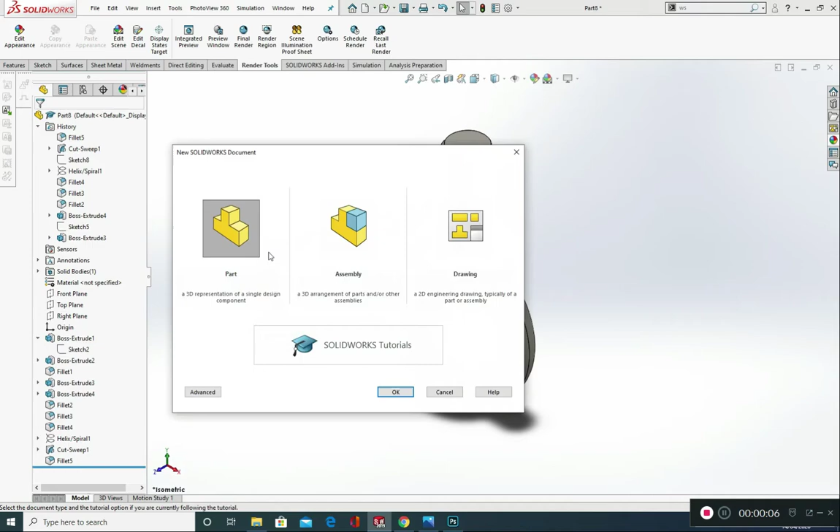Okay, so I'm in SolidWorks and I'm going to go to File, New, Part. We're going to start this off in the top plane and go to Normal To. We're going to go to Sketch and sketch a circle from the origin point, left click. We'll go to Smart Dimension, left click on the circumference, and give this a smart dimension of 20 millimeters.

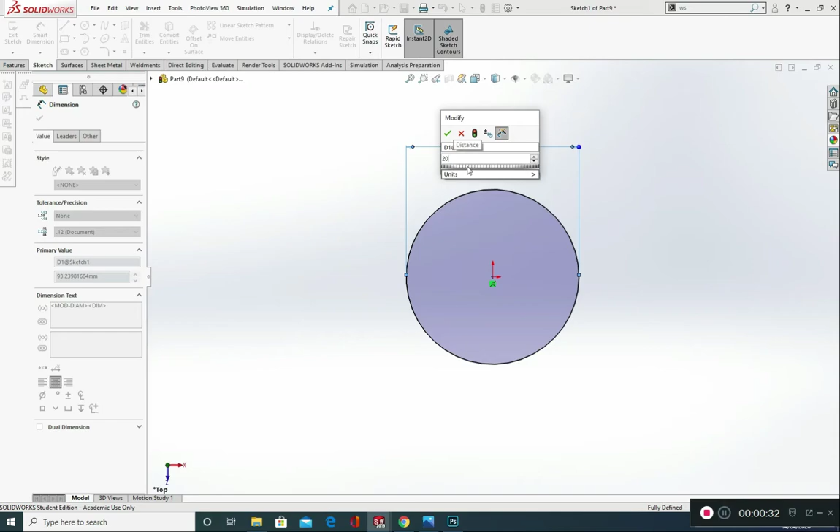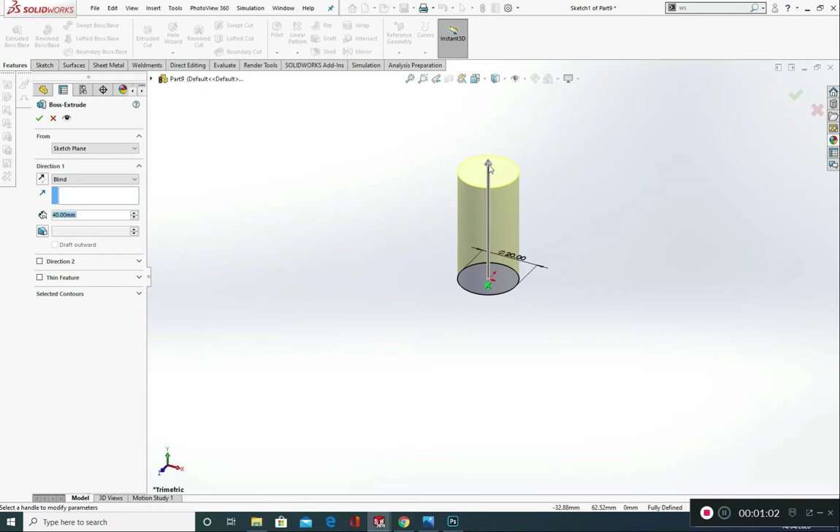From here we're going to make a feature out of this sketch. We're going to go to Features, and you'll notice there's a few options in here. We're going to choose Extrude Boss Base. You can see we're getting a preview of how much that's getting extruded by at the moment, that's getting extruded by 10. However, if I click these arrows they'll go up in increments of 10. Alternatively, I can get the arrow on screen and move it down, move it up, move it the other way, to have a look at what my extrude will look like in order to turn that sketch into a 3D part. I want to extrude this by 40 millimeters, and I'm going to click on the green tick. Perfect.

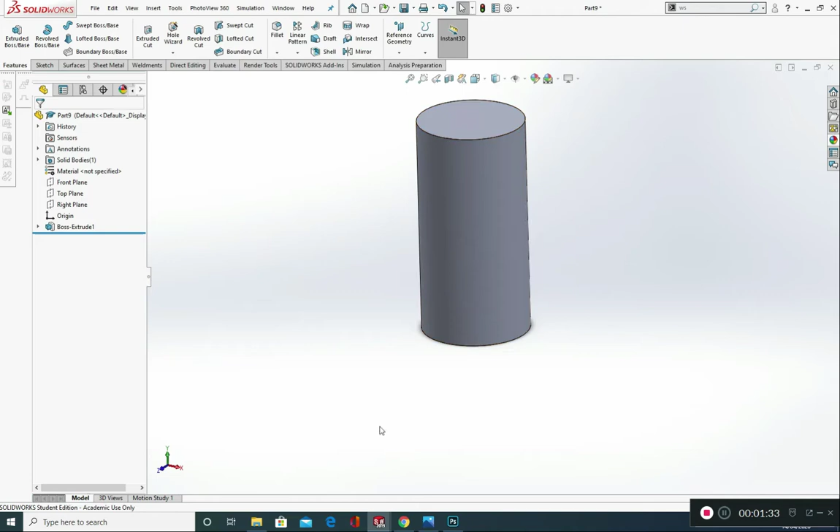From here I've just clicked on origin there to see where my origin point was. We're going to click on this face, so orbit your model round using the middle mouse button and moving the mouse. Click on this face and we're going to say Normal To. Alternatively, we can click on this face and press Ctrl and the number 8 on our keyboard, and that will do exactly the same. From here we're going to go to Sketch and Circle.

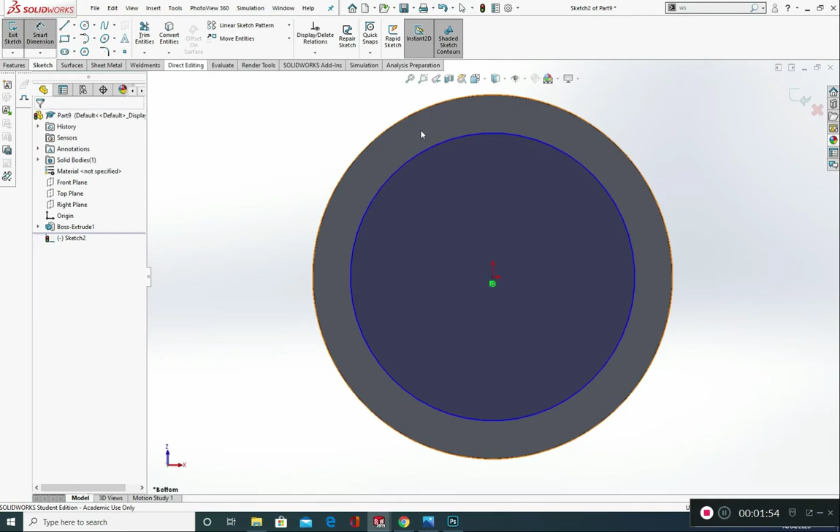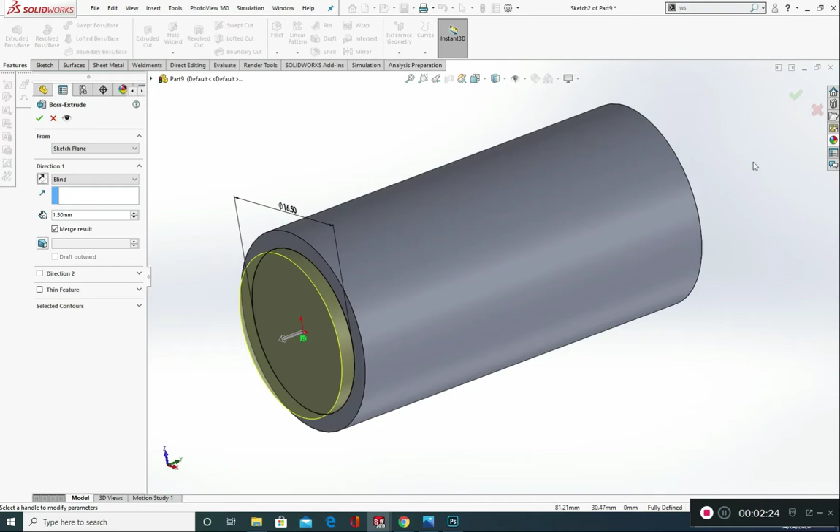You're going to sketch a circle here and give this a smart dimension of 16.5 millimeters, like so. You're going to do exactly the same on this one: go to Features, Extruded Boss Base, and let's extrude this one by 1.5 millimeters, only a tiny bit, in this direction. Make sure that you've not flipped it and it's going inwards - it should be going outwards, so the arrow's facing away from this cylinder that we've created. Once we've done that, click on the green tick.

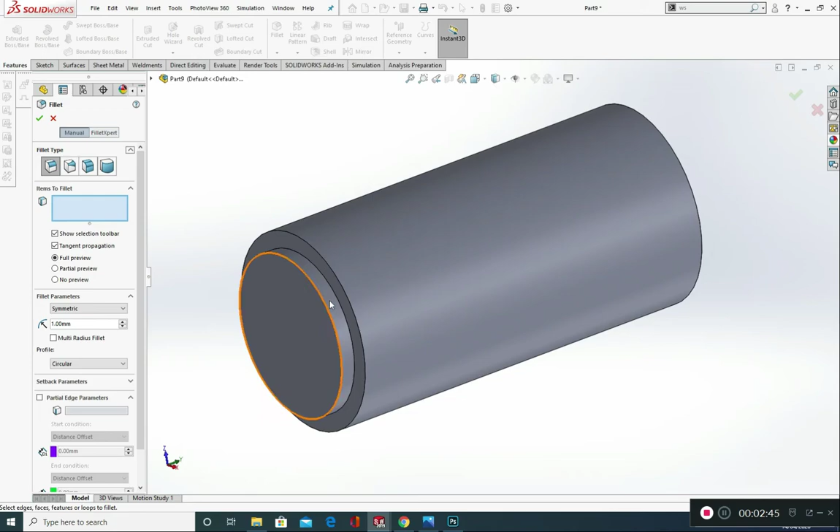And then go to Fillet. So in Features you'll see Fillet, and under Fillet you've got Fillet and Chamfer. We want to fillet by 1 millimeter, so in your fillet parameters change that value to 1 millimeter, and we want to click on this edge, like so. We get a little preview, and we're going to press the green tick.

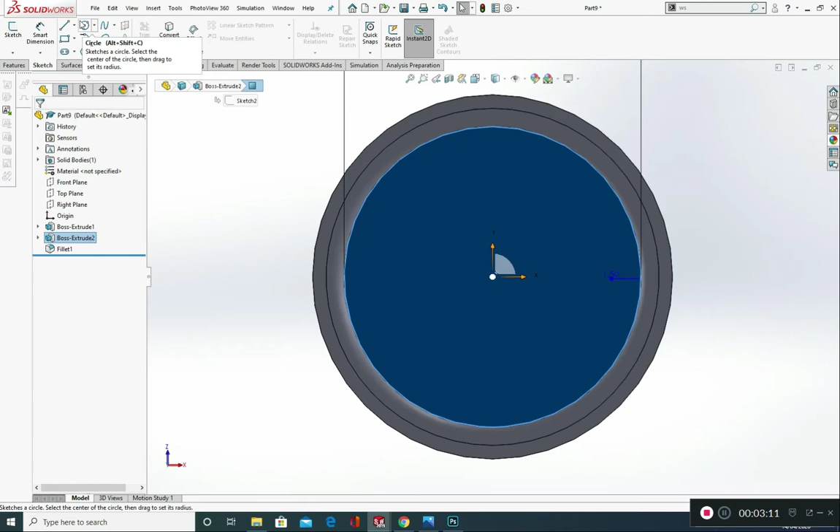From here we're going to click on this face and say Normal To, and create another circle. So we're going to go to Sketch again, Circle, and create a circle again from our origin point, sketch that out, then smart dimension it up - this is going to be 40 millimeters. We're going to go to Features, Extrude Boss Base.

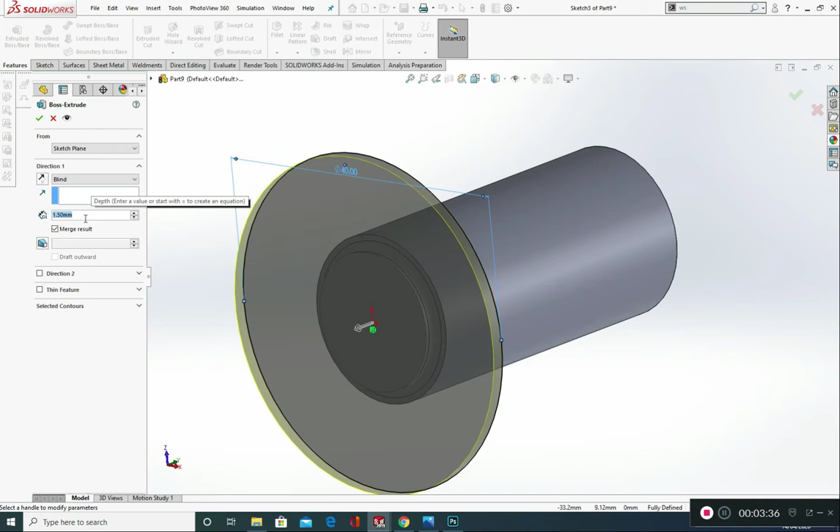This one's a little different. We're going to extrude this by... let's go 15. In fact, let's change this - let's go 18 millimeters on this, 18 millimeters, and we want to create a draft angle. So here we're going to click Draft On, let's turn that on, and we're going to put a value in here of 7 degrees, so 7.

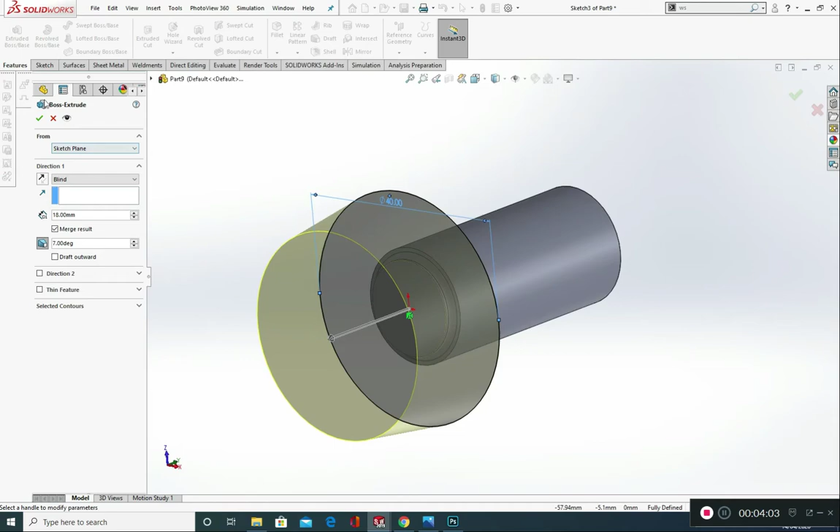And we're going to click on the green tick, like so. I want you to go into a front plane now and normal to.

Then we're going to sketch a circle, and I want you to sketch 2 circles. Try and keep it in line with the origin if you can. I've not clicked yet, I'm just hovering over my origin, and you notice you're getting that blue dotted line. That tells me I'm in line with my origin point. You can do it with this point here too, move down and you're going to get a blue line there. Left click, and I want you to draw 2 circles.

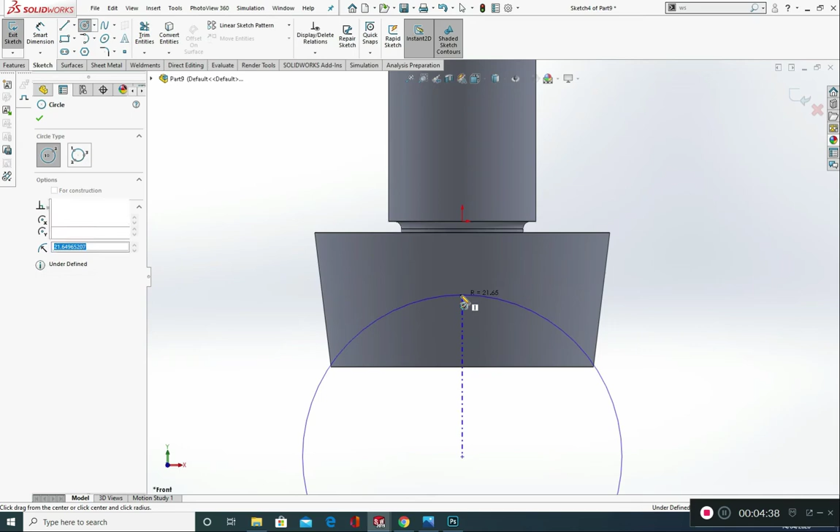So that's one. Go back to that center point of the circle, draw another one, and you're going to give these some smart dimensions. Now, before you do, let's just make sure our center of our circle is lined up with the origin point, and to do that we're going to create a relation.

I'm going to click on the center of the circle, hold down Control, click on the origin point. I've still got Control pressed down. I can let go of Control, and I can make a relation vertical. You can see these 2 green markers now, that's telling me those are locked in, and the relationship between those will always be vertical unless I delete them. If you wanted to delete them, you could just hover over, right click, and say delete. We're going to keep these in place.

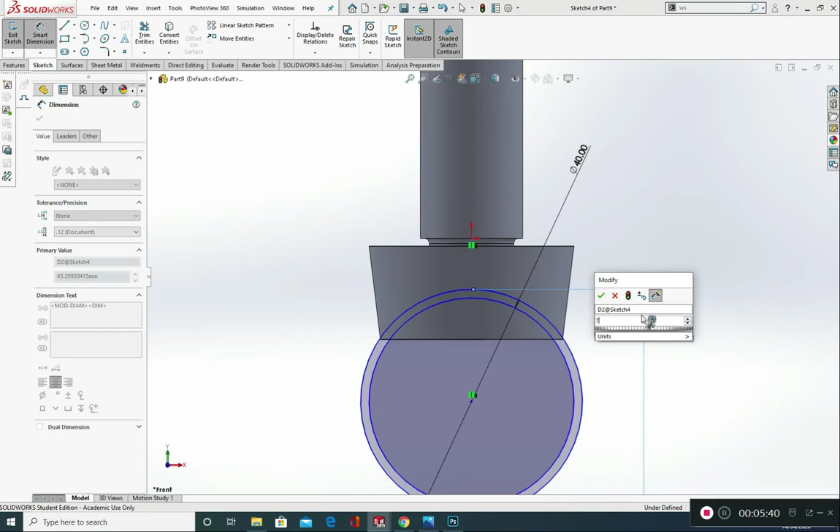Right, let's smart dimension up our circles. The inner one I would like to be 40, and the outer one we're going to make this 70. We need to give a smart dimension from the center to our origin point, and I'd like this to be 36.5 millimeters, and green tick.

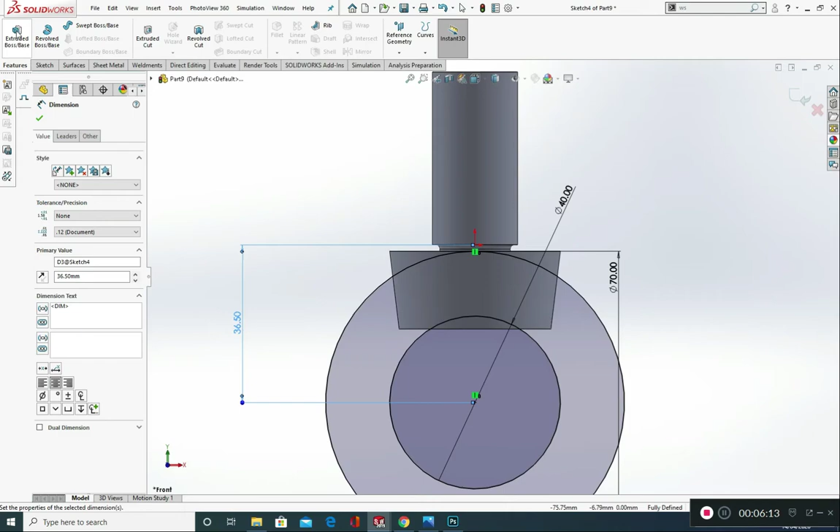I'm going to go to features now and extrude boss base. Now, at the moment we're extruding this blind in this direction. We want to change this direction from blind to mid-plane. There's our origin, it's going to go an equal distance, if I put 20 in there for example, it's going to go 10 one side and 10 the other, just to make it nice and equal. We're going to put a value of 15 in here, and click on the green tick.

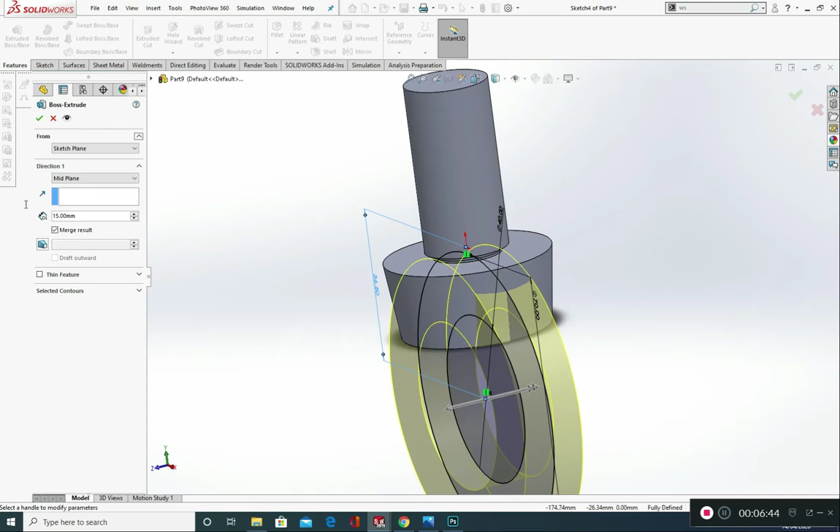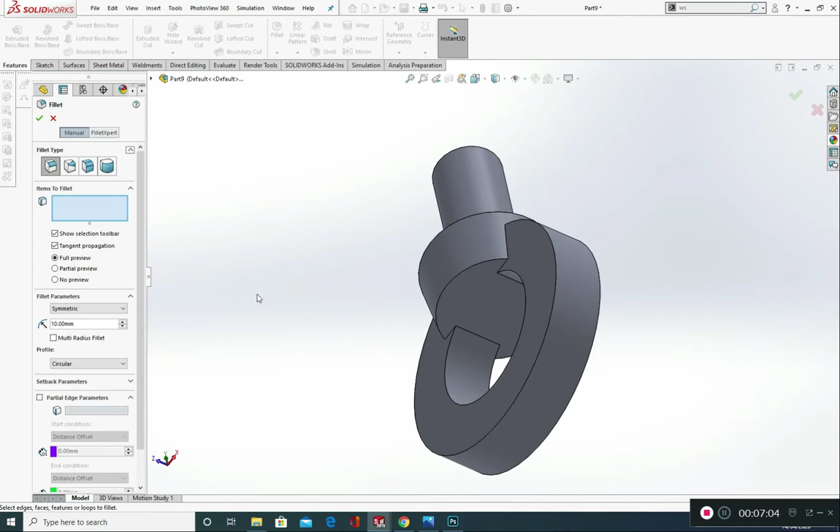Perfect. The next thing we're going to do is go to fillet. We're just going to put some fillets in here. So let's go with a fillet of, let's have a look what 10 looks like. It's a bit too big, let's go 8. Maybe a little lower, let's go 5.

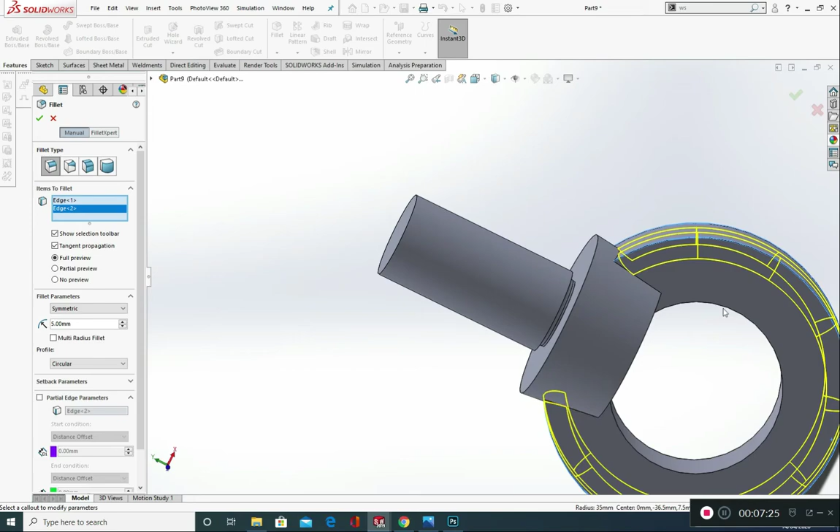Okay, 5 on this side. We're going to go 5 on this side. We're going to go 5 on this edge here, and we're going to go 5 on this edge here, like so. I'm just going to have a little look at that. Green tick. Okay, I'm quite happy with that.

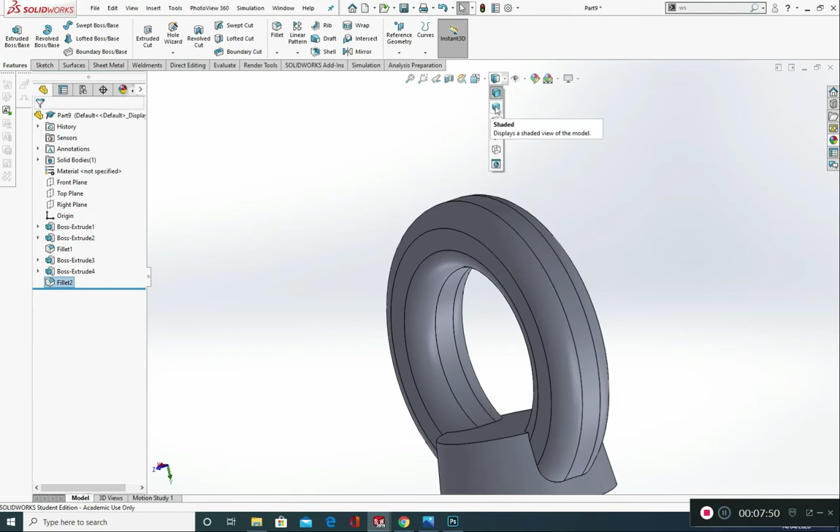The lines that you see there, you don't have to see those, you can turn those off if you want. If you go into display, you can just have shaded, you don't have to have edges, you can just go into shaded. I'm going to have shaded with edges though.

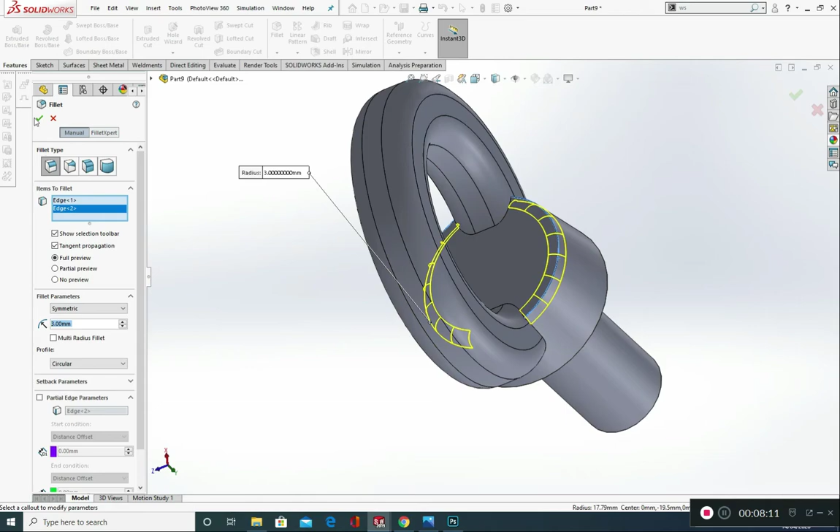Let's put some more fillets on here then. So let's go into fillet, and let's choose to have a fillet of 3 millimeters this time. Let's do this top bit here and this side here, just click on those edges and green tick. And we're going to go into fillet again, and let's do some 1 mil fillets this time, around here, and let's go around on the other side as well. Perfect.

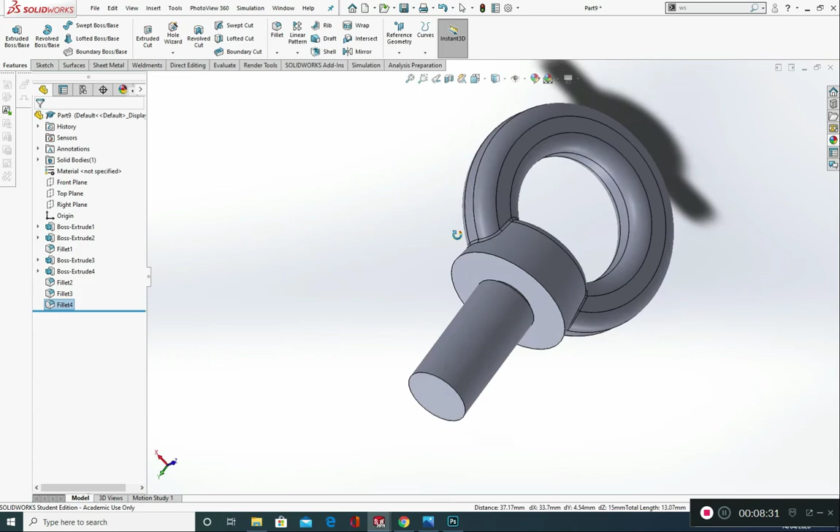Okay, and let's go for a 1 millimeter fillet on here as well. Lovely. Right, from here we're going to create a

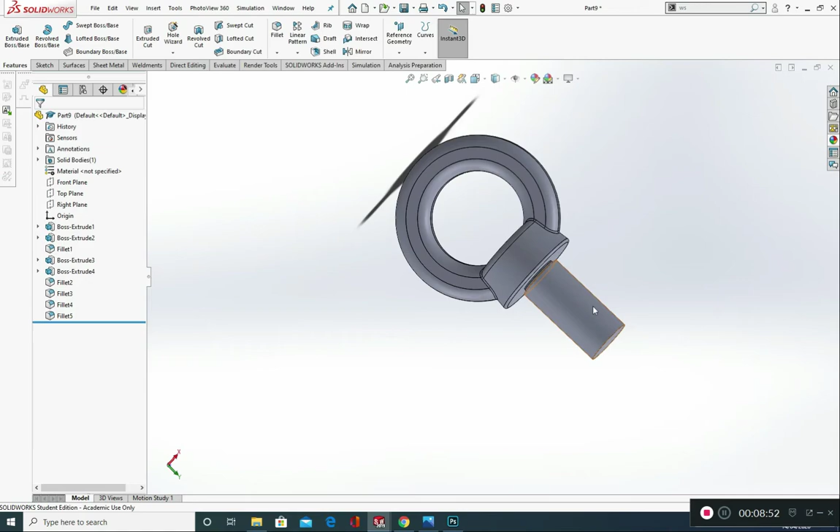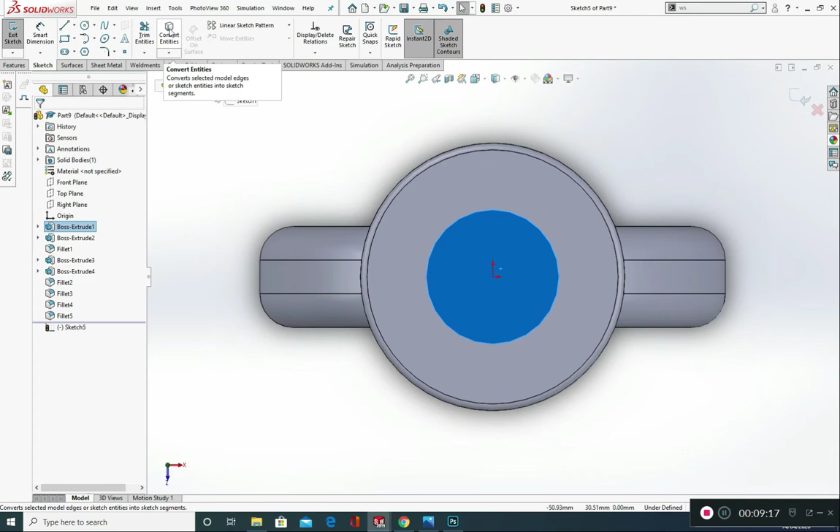Helix on this surface, this face should I say here. So you're going to click on this face to start off with, and we're going to say normal to. Just do that again, left click on it, normal to, and we're going to say sketch. I want you to say convert entities, that's in the sketch tab, so convert entities, like so.

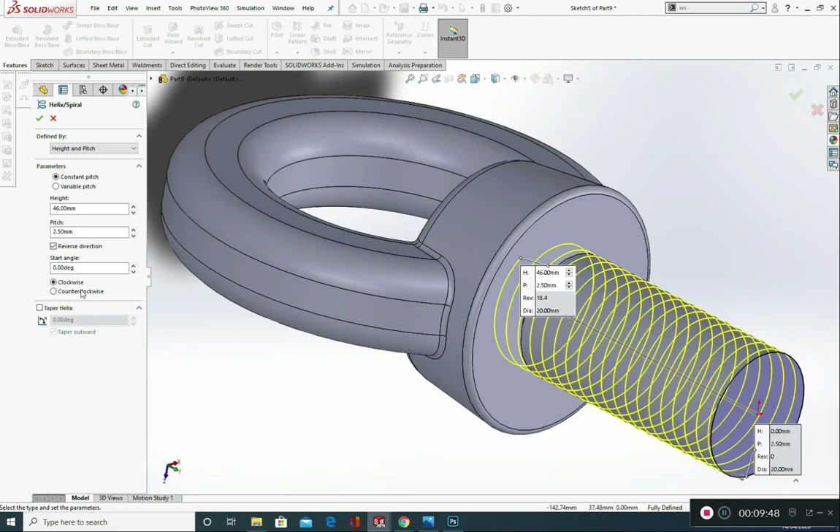And then you're going to go into features, curves, helix spiral. Okay, now we want height and pitch, constant pitch, 46, 2.5 is the pitch, reverse the direction so it's facing in the direction of the eye, start angle 0 degrees and clockwise. Okay, and you can click on the green tick. You can see that our helix is in place.

We're going to go to a right plane now and normal to, and then we're going to sketch up here. We're going to sketch our cutting profile. So I've just gone to sketch and line.

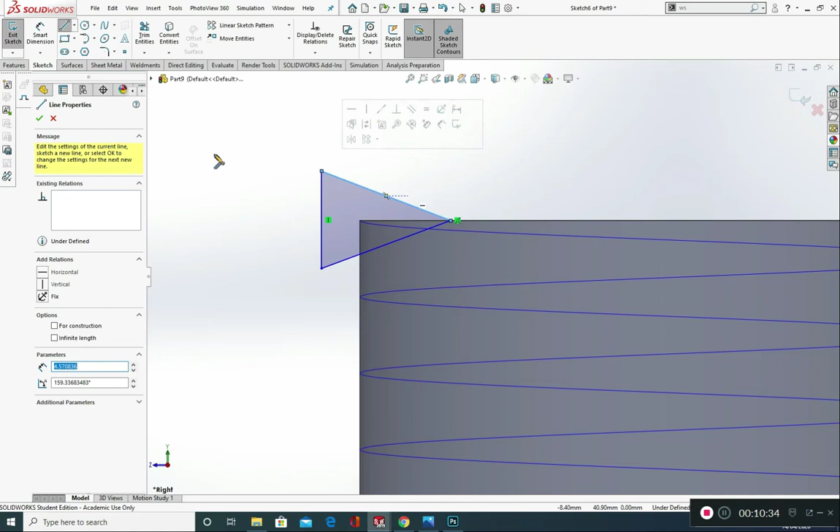I'm going to draw a triangle in there like that. Just going to put a center line from the tip of my triangle to the midpoint of the base of it. I'm going to click on this line here, hold down Control, and click on this line, and make those equal.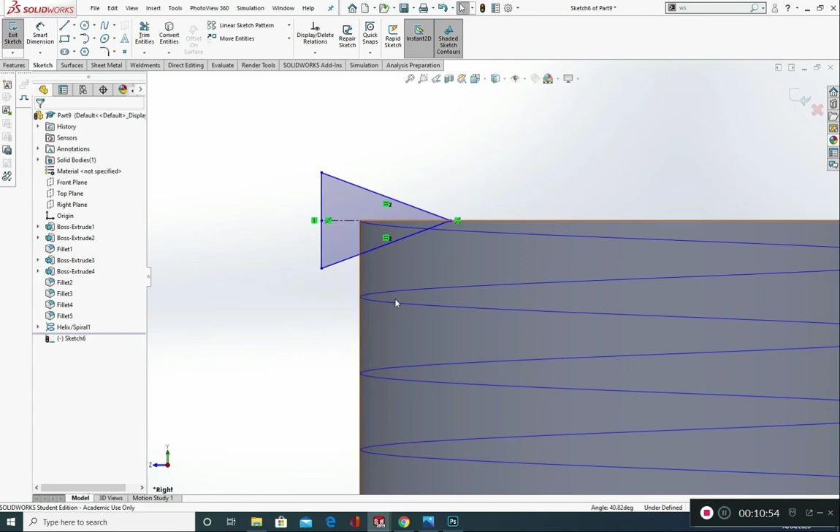Like so. And I'm going to smart dimension this up now. I'm going to give a smart dimension for the angle. This is going to be 52 degrees. I want a distance from this point to this edge to be 2.2, and I want a distance from this point here to the bottom of my triangle, so the height, and I'm going to make that 2.52.

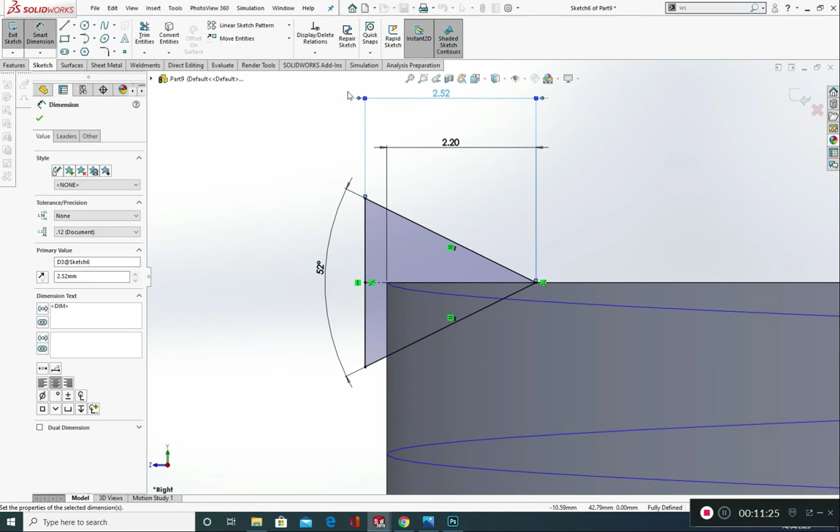Now from here you can exit the sketch, so click on this blue arrow that goes through this kind of shape here. Just left click on that, and then from there we're going to go to Features. We're going to say sweep cut.

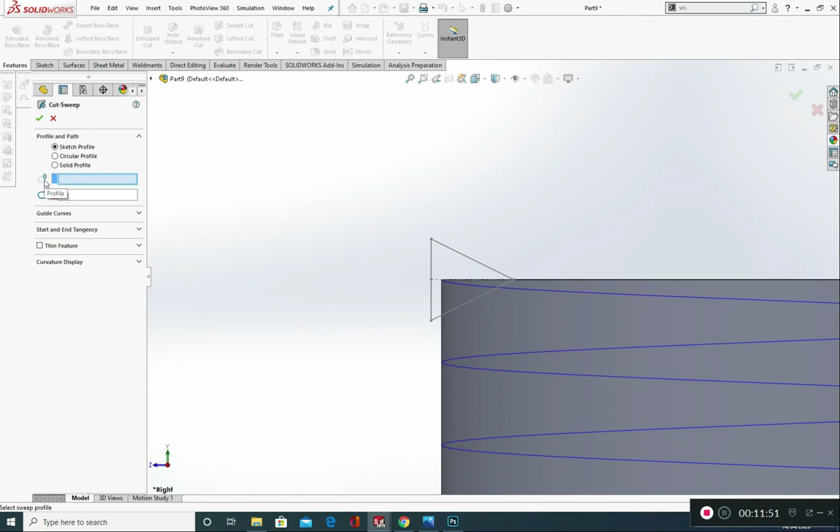It's asking us here for our profile. This is the profile, so left click there, and then the path is the helix. Okay, it's calculated that cut. We don't need to change any other options in here, we're just going to click on the green tick.

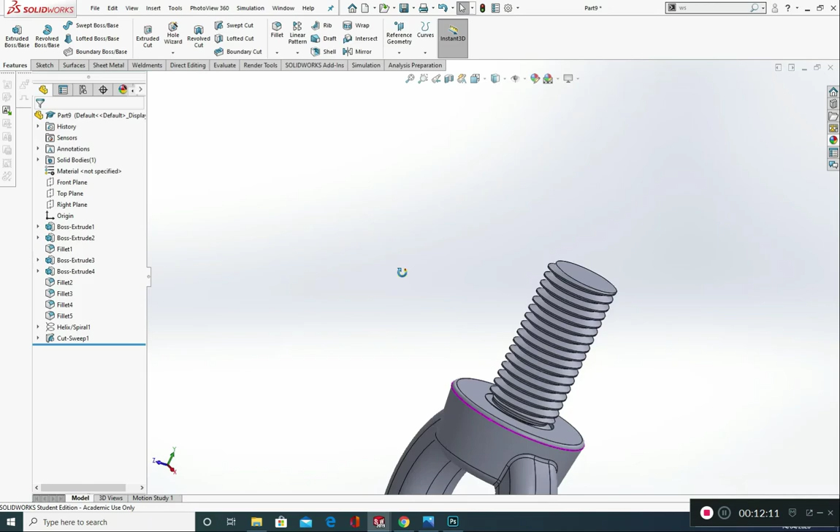We're going to hide our helix, so go to helix and hide, and you can see there the thread that we've put on.

Control 7 on my keyboard, and what I'm going to do is change the appearance of this. So I'm going to go to Appearances, Scenes and Decals. Just going to left click on that. I'm going to choose steel, and I'm going to choose machine steel, and I'm just going to literally drag that over with my left mouse button held down and drop that onto the model and choose.

I've got either this first one, okay, which is just selecting this area here. I've got fillet 2, so 2 fillets - the first one's just that fillet, the face of it, 2 fillets - or I've got this one which is all of the body. That's the one I want to choose, so body, and just select that.

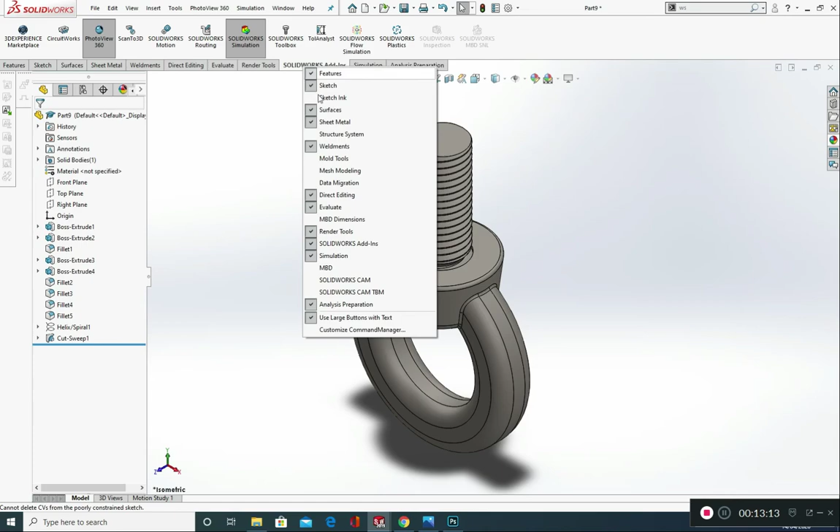Okay, then from here, if you wanted to, you could render this out by going to SolidWorks add-ins. If that's not available, just right click on these tabs and make sure that it's got a tick at the side of it here. If it's not there, it's probably because there wasn't a tick at the side of it.

So you're going to right click, turn on SolidWorks add-ins, go into SolidWorks add-ins, and make sure that PhotoView 360 is selected. Click on your Render Tools tab. If that's not there, again you'll have to right click and ensure that Render Tools here is selected. And then we've done the appearance of this one.

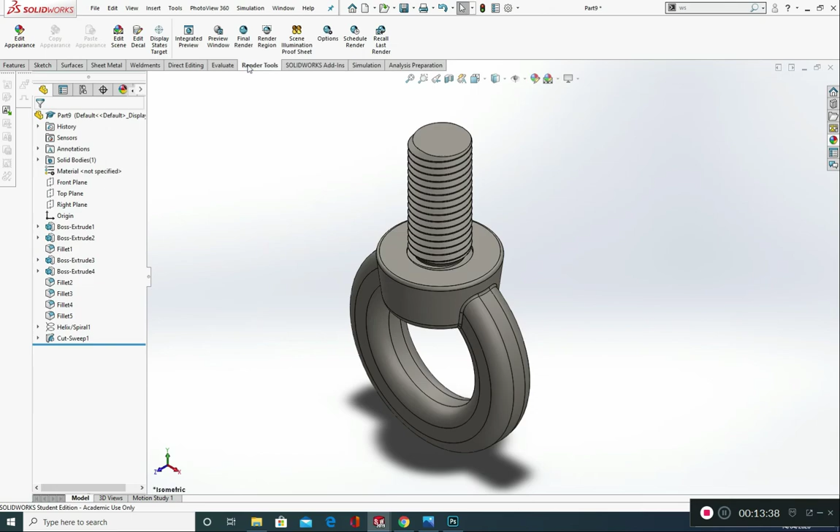You could edit the scene, so let's left click on that, edit the scene, and there's loads of scenes to choose from here. Let's go with a basic scene and let's go with a soft box. So left click, drag, and just drop that onto your background.

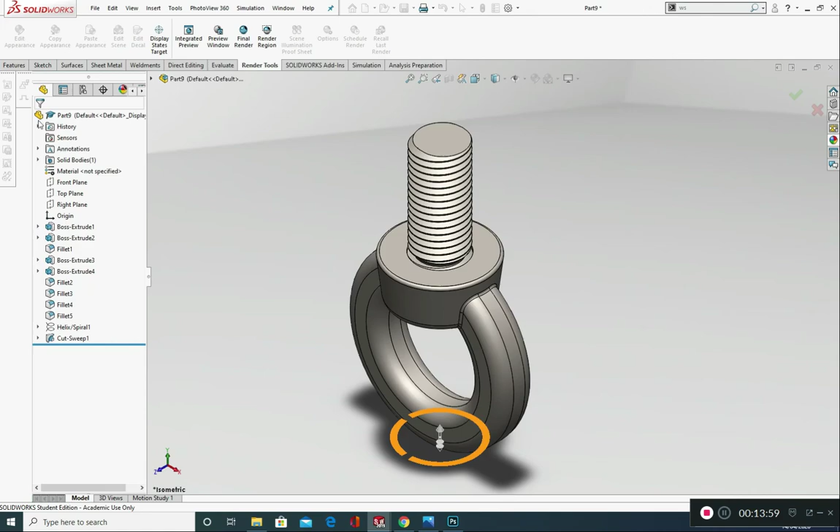From here we're going to click on the green tick and we're going to choose render region. Okay, let's just move our render region across just by using the little grips at the side, just so it covers our model. You can zoom in and zoom out here as well if you want to. The reason why people do this and change their render region is just to concentrate on the area that they want to render out, and doing that as well reduces the render times.

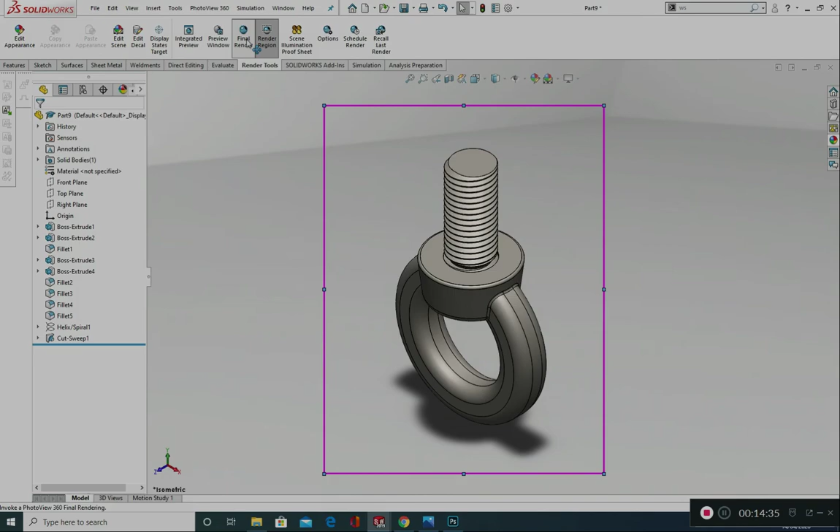So we're going to go to final render now. And I'm just going to pause the video there whilst this renders out. And there is the final render of the lifting eye bolt.